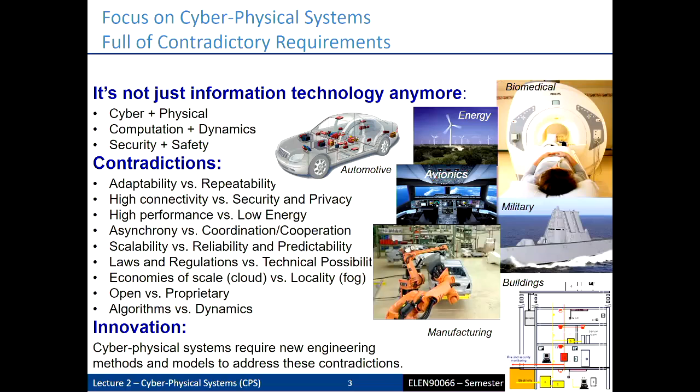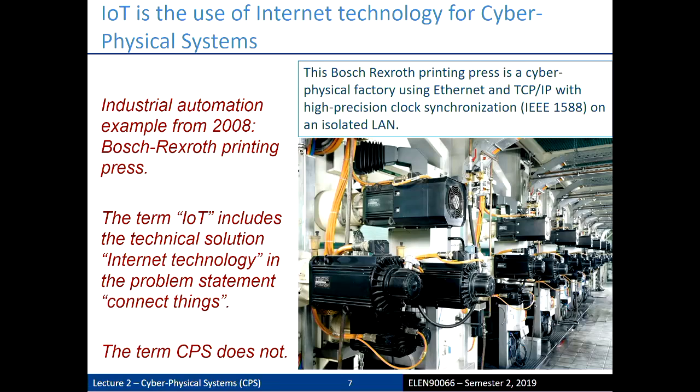There's lots of things to think about though. What happens if something goes wrong with this machinery? Is there just some big red stop button that you can hit and everything stops? Maybe, but that's probably only in a very bad emergency. Designing a system like this, even with all those tight controls on the timing and automation, still means that you have to think about emergencies. If this thing goes nuts, or if the tape doesn't stick and suddenly some loose paper comes into the system, you can't just stop things.

These rollers, the machinery in here, is hot. If you just stop and leave paper sitting in a hot machine, it catches fire, okay? So you have to think about creative ways of shutting this machine down in a safe fashion. And that's about safety and reliability. That's going to be one of the topics later on in the subject. That's something else to think about.

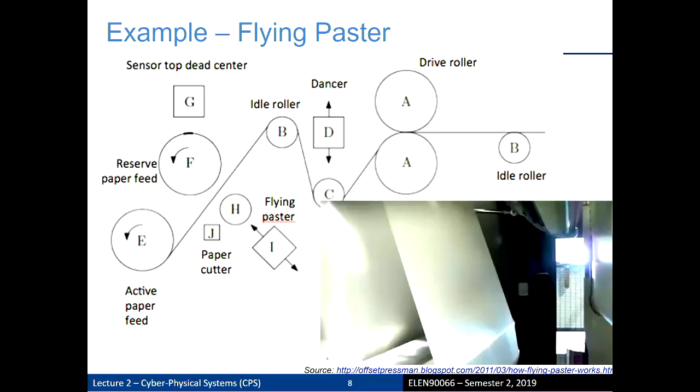So let's have a look at the thing in action. It's noisy.

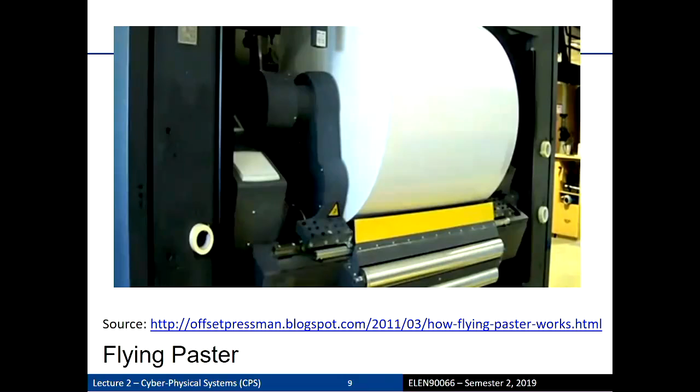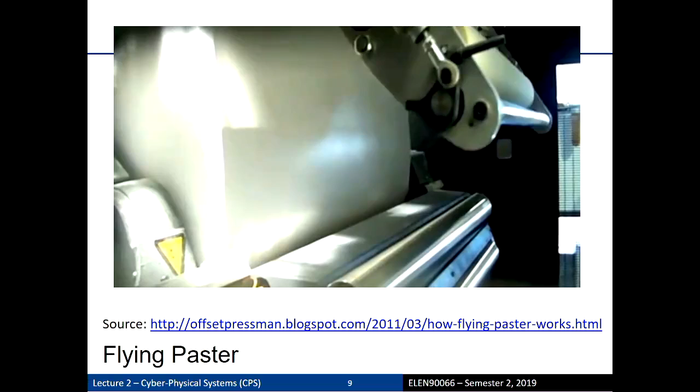So that's the main. That's the paster bit coming in. That paper's spinning through very quickly. That's the reserve roll, spinning up to speed. And then, done, and the machine just keeps printing. That's travelling at 100 k's an hour, that paper spinning around there, and it was seamless, right? It just kept doing its thing. Amazing. So that's a little cyber physical system there with some very, very difficult technological issues to overcome.

Okay, so you guys, sorry, I didn't want to show the video just yet.

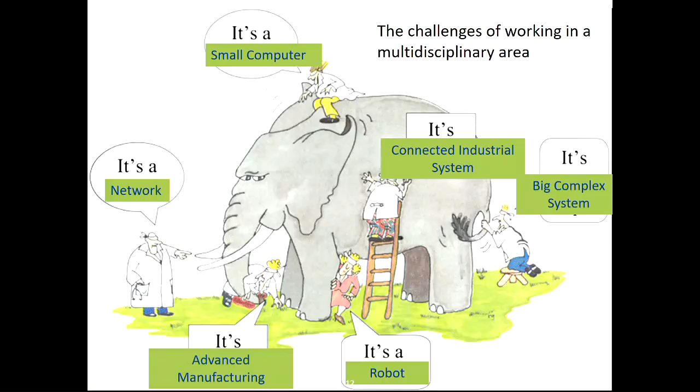I'm going to talk a bit about the societal challenges, but one of the drivers, funnily enough, one of the big things that's happening now is the whole automation of driving, and that goes with that freeway crash that you saw there. Automotive CPS addresses a lot of the societal challenges. So things like safer transportation. We could, in theory, get rid of driver-caused accidents.

We could even assist with energy efficiency. Humans are notoriously inefficient drivers. They really are. Accelerator, brake, not reading the traffic, right? And you flat to the accelerator, flat to the brake, right? That's not very energy efficient. If there's some sort of algorithm that could actuate the accelerator and the brake to be more efficient, sure, that's a cyber physical system.

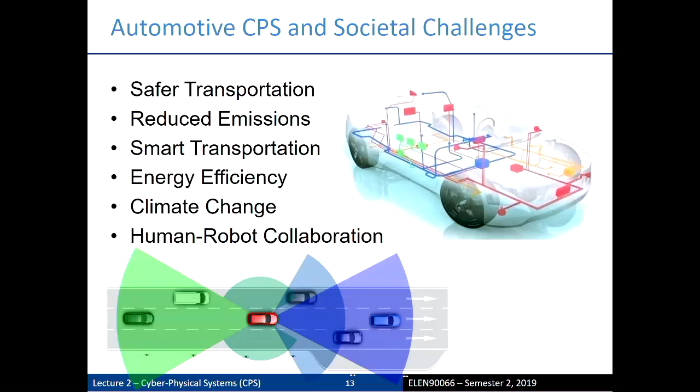Even climate change, right? Well, if you don't like the term climate change, reduction of pollution, maybe. That's also a cyber physical challenge. Really? Is it? Sure is. Cars spit out ugly stuff out of the exhaust. Nitrous oxide, carbon monoxide, whatever HC is, hydrogen something. I don't know, I'm not a chemist.

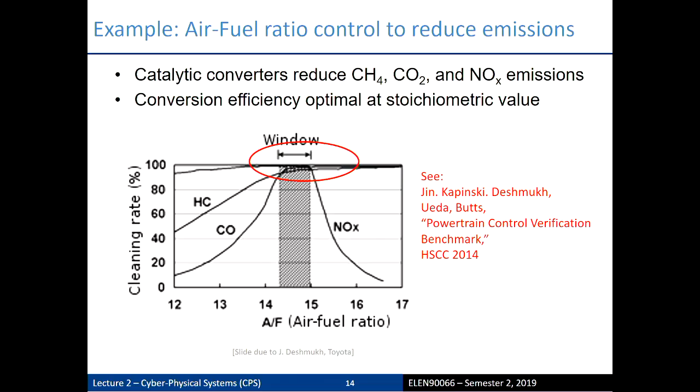So if you can control your car, the air-fuel ratio, to be in this range, you are obviously emitting much less pollution. Why is it a cyber-physical system? Well, you've got moving parts. You've got an intake manifold that can adjust the amount of air coming in and can measure, via sensors, the airflow, right? The mass density of the air that's coming through.

You've got your combustion chambers, the cylinders, and the pulsed fuel injectors that are pulsing fuel into the cylinders. And on the exhaust side, you've got a measured A/F and also oxygen sensors to pick up some of those noxious gases there and work out what they are. And underpinning all of that, you've got software. You've got people that have come and written the code

that determines how to adjust both the air and the fuel, the ratios of those, into the cylinders in order to get the perfect stoich ratio back here, right? To get it in that window. Now, that software is something that, if it's written in C and running on a microcontroller, more about this next week, there's a set of instructions that run at a particular time. Just a set of instructions, C code, just running instruction after instruction.

How does it interface with something that's continuous? You're continuously measuring airflow on both sides of the vehicle here. Sure, analog-digital conversion, that's fine. But there's some very subtle nuances there about timing. When are you going to be sampling the airflow that's coming in and out of here? How does that relate to some master clock that is directing the operations of the software? This is a hybrid system, and we're going to talk a bit more about this later on.

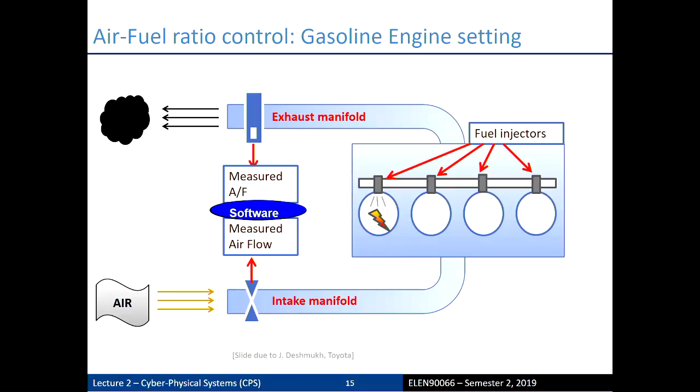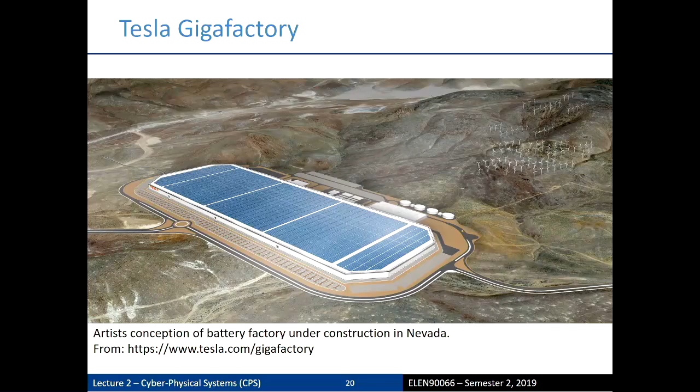Tesla got into it as well. Batteries. We need batteries for our cars. We need batteries for storing solar power in people's homes, Tesla Powerwalls, those sorts of things. So they've got this massive gigafactory in the States there, right? And where's that sit? Energy storage. They're cornering that thing there.

And these big companies are not dumb. Lastly, obviously, there might be an Apple car coming along one day. They're not dumb as well. They're putting big resources in there. Recently, they just pinched a senior exec from Tesla. So it's pretty obvious that that's what they're doing.

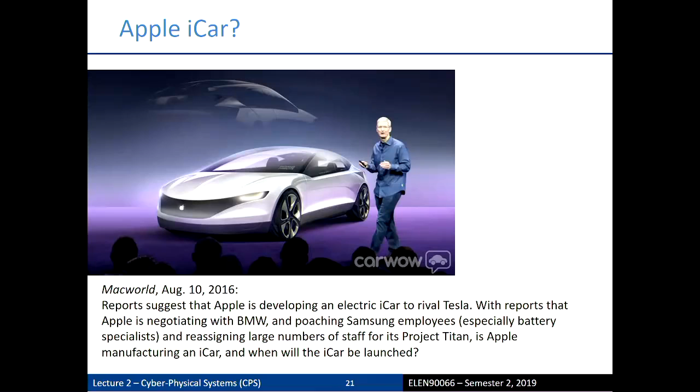And he brought it to school one day, and I thought, why have you got a phone? And he just said, it's out there, it's new, or whatever. And I just thought, no one could call him, right? Because no one else had a phone. So he'd just be walking around with this phone all the time. And we're talking about one with an orange screen on it, right? It didn't even have colour or anything. It was really weird. And it had a pop-up aerial and all that.

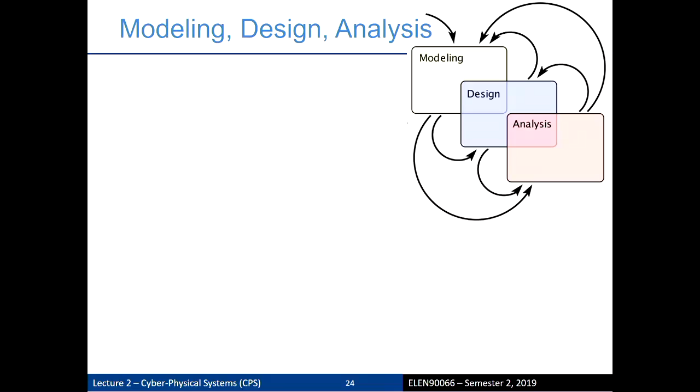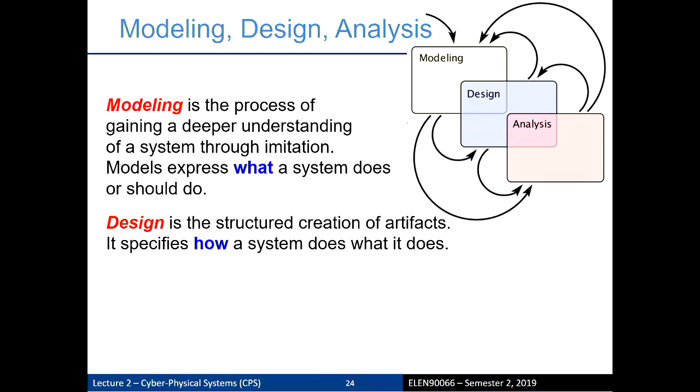Okay, so obviously we're going to be doing this in these sort of 3 phases, and we're going to chop and change between them. That's all right. We're going to model. I'm sure you pretty much understand how to model things, right? It's about expressing what a system does. That means, obviously, well, we may have to go to physics. For instance, physics is very common with cyber-physical systems, maybe less so chemical stuff, more often physics, or should do. Design. I'm pretty sure we have a good concept of what design is about, how a system does what it does.

And lastly, the analysis part. And this is where I think in terms of how we're going to follow the book is going to fry your mind a little bit about being a bit more rigorous about specifying why a system does what it does and knowing when it fails, why it fails. That's the problem with the hacking approach. And I've seen it where I have had capstone students put together a few bits and pieces to make something and it's failed and they've got no way of knowing which component caused the whole thing to fail. They've just got no way of doing it because they didn't do a proper analysis of the system.

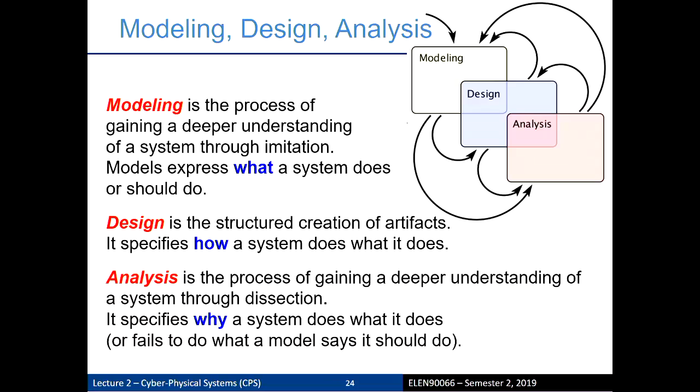Okay, so I'm going to give you a nice little example. Quadcopter, quad rotor, drone, whatever you want to call it. Technically, it's a quad rotor. This is one developed out, I think this is a Stanford one here. It's a very basic quadcopter. And this is not just a commercial one you go and buy. This is one that was built over in the US.

And what I want to point out is the process that was followed follows exactly the course of the text, if you think about it. This is not, once again, about going buying some props and a motor and hooking up a microcontroller and just getting it up there. You need to know the dynamics of the damn thing first. You've probably got to sit there for a few weeks or months and work out the physics of it.

Not next week, in a few weeks' time, we're going to model a helicopter model. And you already see that's a difficult thing to model. You've got 3 dimensions, but you've then also got rotations in those 3 dimensions as well. Very difficult thing to control. Right, so flight dynamics. Modes of operation.

If we think how a program is going to work on this, it has to work in different modes. There's a mode for takeoff, perhaps a mode for just cruising along, and a different mode for landing. The dynamics could be very different with those different modes, so the model may be changing depending on the mode we're in.

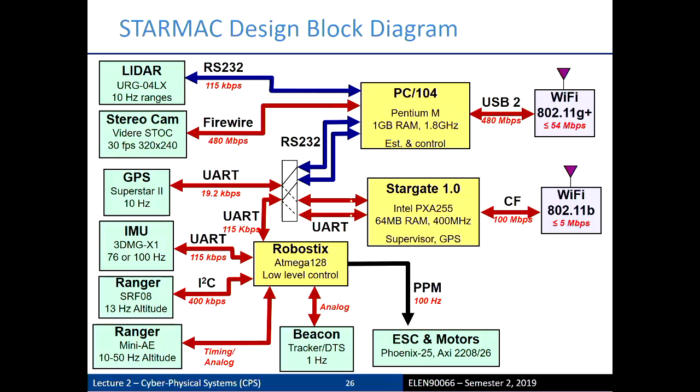So there are 3 modes of operation, right? Give it an impulse to get it up there. A drift stage.

Oh, what? Thank you. It's on the other monitor. I hate dual monitors. Which side is it on? That one. Thank you. Now I can't control it. Ah. Oh. Okay, so let's get back.

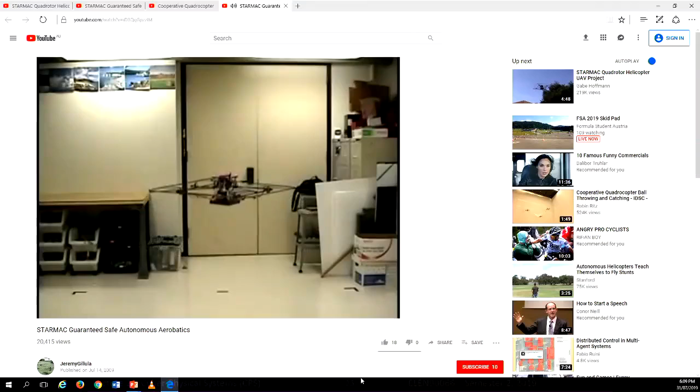Right, there are 3 modes of operation. It's not trivial changing the operating conditions, right, as it's in a different mode. You've got a switched system that has to suddenly change the model of the system based on what mode it's in. The dynamics could be different as well. So here we go. How do you prove that it can do a backflip? Right, that's its goal. Just flip it.

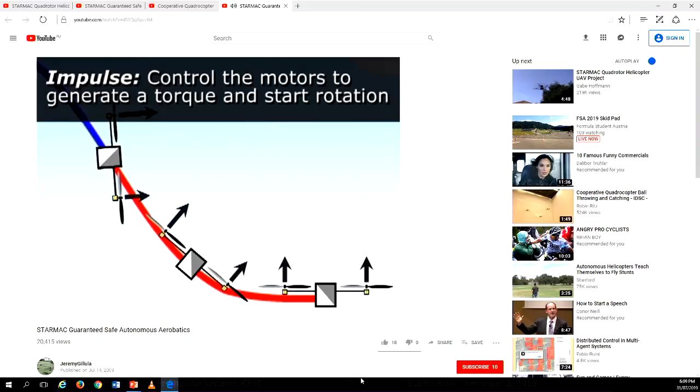There are 3 modes. Give it an impulse to get it up into the sky, basically high enough. You've got to generate torque to get it to rotate. Then you have to turn the motors off while upside down, otherwise you're going to fly into the ground. And then you've got to turn them back on to stabilise it in order to get it back to level flight.

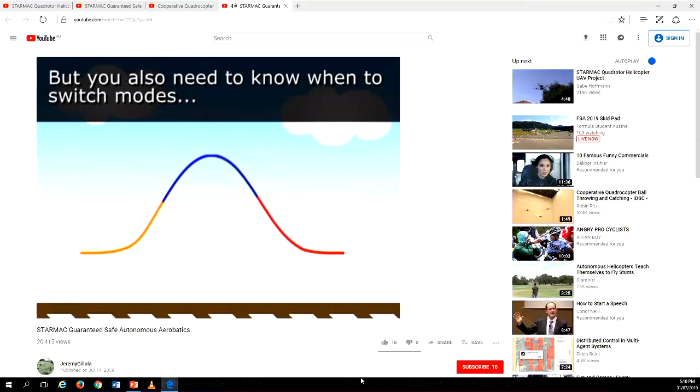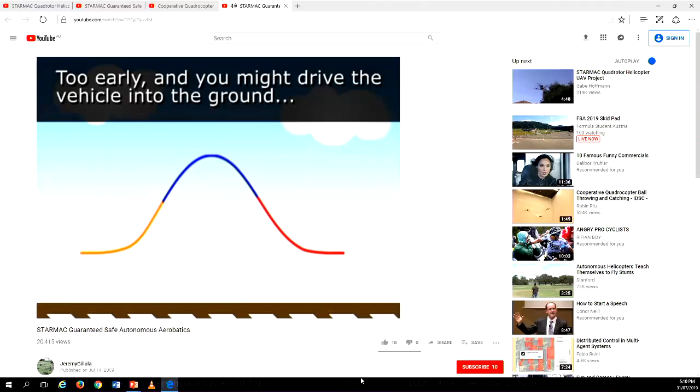So bad things can happen, right, if you don't get the timing right. Too early or too late, you could be in trouble. So when do you determine the safe switching conditions in order to get it to do that? You need to do a reachability analysis.

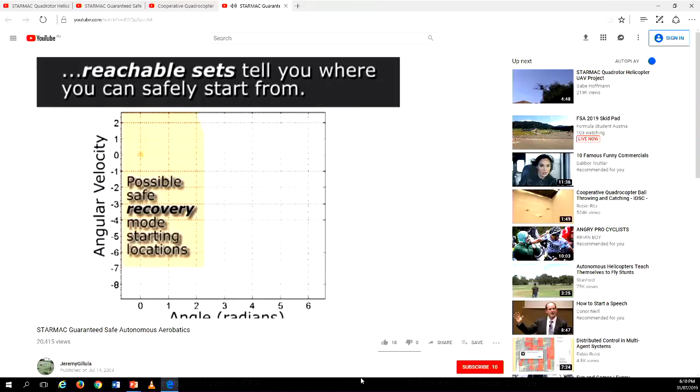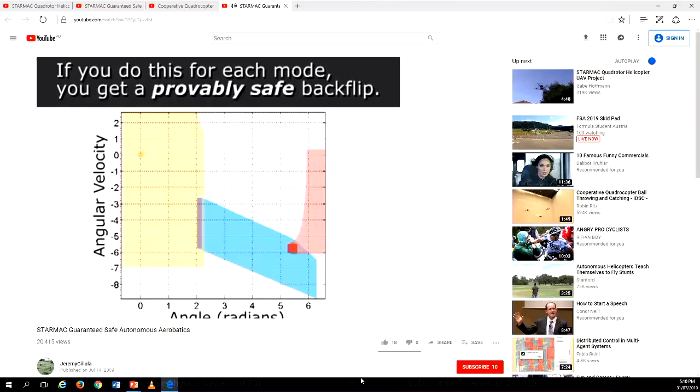So if you're plotting the angular velocity versus the angle, you can basically show these regions where certain things are safe. And the transition to those regions are going to be the goals of each of the other stages. Okay, so you've got goals of those stages to be in the region of the next mode of the system. The theory is sound. Now, as for practice, right, let's see.

Can it do a flip? It's even got a countdown. Nice. Yeah, did it. Okay. And that was starting at fairly low. This is starting very low, so it's probably on the edge of its operating parameters. Yep. And just recovered in time. And then decides to fly away or something. Is that the end? Yeah, that's the end. All right, so that's from Berkeley, actually.

All right, now, how do I get my screen back? Screen, where are you? Mouse, where are you? Yeah, all right, I don't want to see you. It is a Stanford test bed, I thought so. Okay.

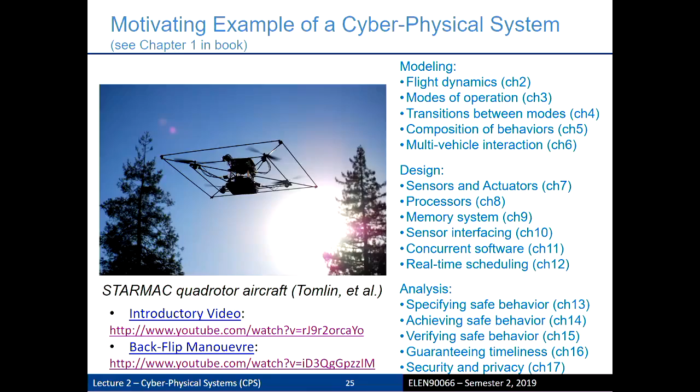Okay, so any subject or course that tells you how to design embedded systems is not telling you the truth, because technology will change. And when technology changes, things change as well, right? So the goal of this subject is not to teach you about the technology right here, right now. We need to use that in the workshops because you've got to see stuff happen. But the lectures are not about the technology right here, right now, and locking in on one particular thing.

As you'll see next week when we look at processors, we're going to talk about every sort of processor out there. Okay? So you guys are going to be the engineers of the future. You're going to take this knowledge and be able to apply it to whatever is around in 5, 10, 15 years' time, because who the hell knows?

All right. We're going to leave it there for this week. Next lecture, we're going to do sensors and actuators. You'll never look at another sensor again after you see that lecture. And then we'll do embedded processors as well.